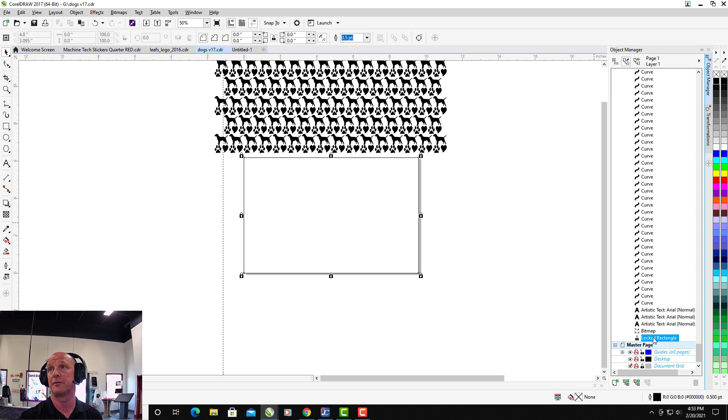So now that I've locked out the rectangle, I want to take my dogs and hold the control key down, and I'm just going to move this up so it goes straight up. What I want to do is take this and unlock it, select these, and go to Object, Power Clip, place inside the container, and then there's my job.

You'll notice if we look here, because when you do a power clip, it basically goes to the center of the rectangle, so everything is set up properly in terms of what I want.

But you can see here the dog is reflecting the other side here, and we've got the dog's head starts here and the bottom ends here. Okay, so everything is symmetric.

It's ready to go, and then basically we can send it off to the laser. The only other thing typically that I'll do is I've got the power clip rectangle selected, and I'm just going to right click on here. That's going to get rid of that object there.

Just in case it doesn't happen to be, you know, a .001 like a hairline, and that will accidentally engrave in the job, which I don't want it to do. So I've gotten rid of that.

The only other thing I need to do now is take my job and turn it 90 degrees, because remember, when we want it to go lengthways, when we bring in the job control is basically going to turn it 90 degrees, and I want my page to do that too. So I'm going to do that. Again, everything is in the center. I'm going to go File, Print.

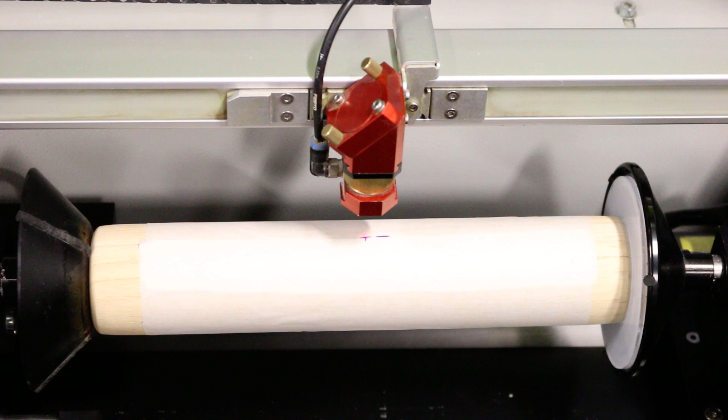I now have my rolling pin situated in my cone setup here on the laser machine.

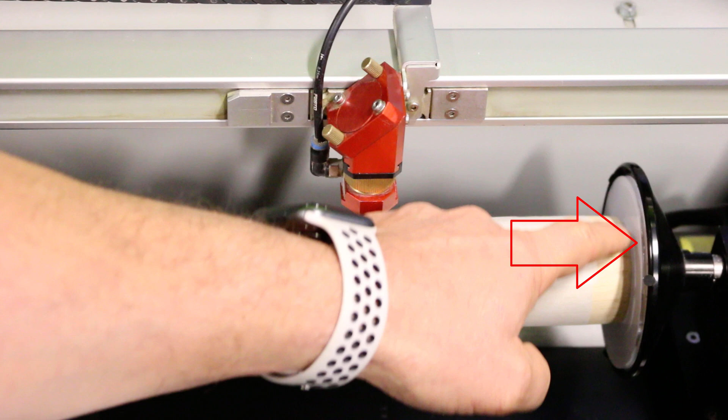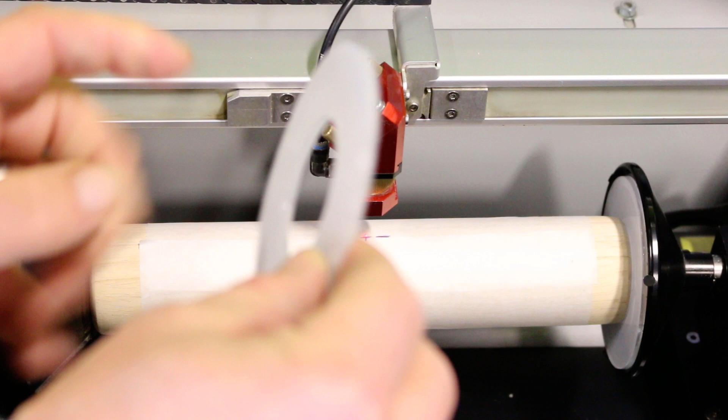Now, one thing to notice is the problem with cone systems for the roller is that this roller will be too far in, and then I won't be able to engrave part of the pin on the end. So what I did was I measured the size of this cone, which is almost 4 inches, and cut this piece of acrylic to be the outside, and I measured the inside part of the rolling pin to fit into here.

So I basically fit this in here. Now the pin sticks out from the cone, and it's in its perfect position. If you're doing this on a regular basis, you could just tape it in if you wanted to. A lot of times it's quite easy to stick that in the end of the rolling pin and press it up against there, and it'll turn properly.

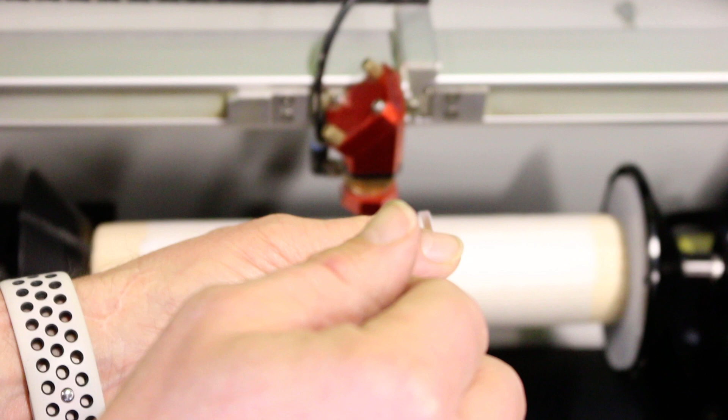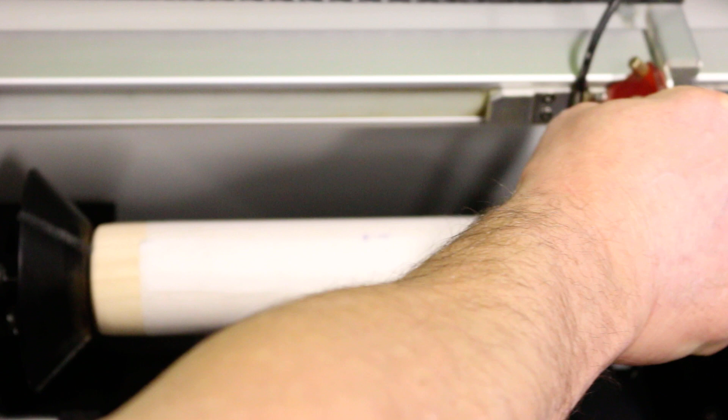Okay, so I've done that to bring the rolling pin away from the cone, so the edge of the cone doesn't get in the way. The only thing you have to make sure is that if you're going to go beyond here, it has to be clearing on the edge. I can check that now - you can see it's going to clear, and I don't have to worry about it hitting.

I've made a plus symbol here, and the plus symbol is basically my dash that I created. It also signifies the center of my actual pin itself.

So just like anything, what I'm looking to do is create something that's template driven, so that next time I do a rolling pin, all I need is a Corel Draw job set up properly, and now I need to make sure my job control is set up.

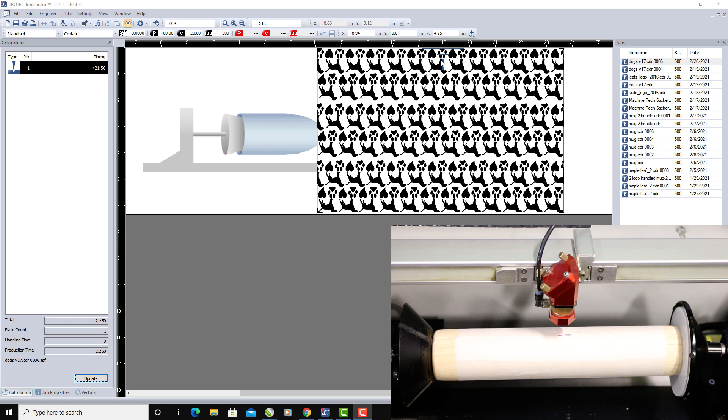What I've done is pressed F8 and created a marker here in the plate, so my artwork can snap to that, basically in the middle. There are a couple of things we can do to check this and make sure everything is set properly.

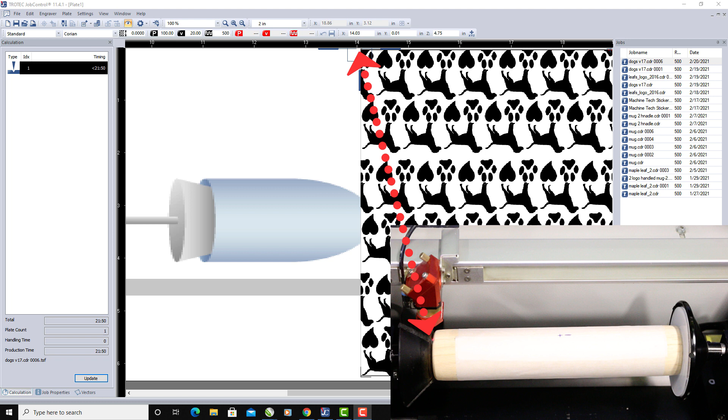I'm going to bring this over to the edge here just to make sure, and if I zoom in, you can see that I'm right at the edge, so I know I'm going to be perfect there. If I bring this all the way over to here and zoom back out, you can see I'm right on the edge there too. So my artwork is set up properly.

The only other thing I've got to make sure is that my turn is proper. So I've got that there. Let's activate my laser machine.

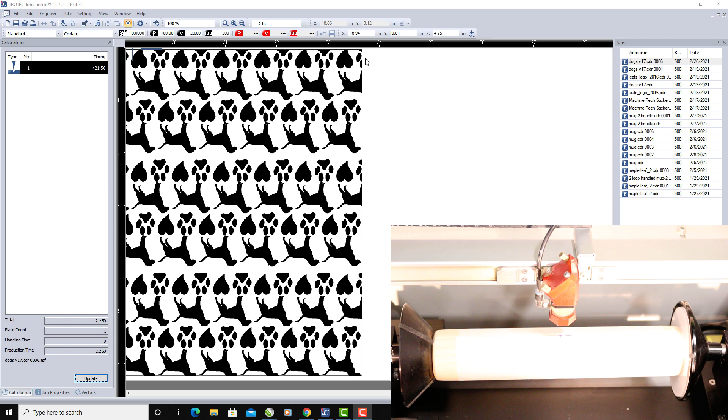Just take it out of suspend mode, and I'm going to use the bottom arrow here and turn this around. I want to make sure that comes up, which it does. If I look here, you can see I'm at the bottom of my artwork. So I'm ready to go.

Everything's looking pretty good. So let's run the job and make sure it goes all the way around and etches up for us. I'm going to take my masking off.

Just want to be careful on this, so let's bring this back up. You don't have to worry about doing any of this masking, because once we've got the template set up, we don't have to worry about anything.

Take this off. And I'm going to bring this back to the starting position, because it's not that big of a deal where we start.

But I don't like the job, the head, to be halfway down the bed, and then when it activates, it's got to go all the way back up to the top of the table. I want it to start directly at the top of the page, so there's no turn on the rolling pin - sometimes if you have something heavy there, it could slip if there's too much turn. So always bring it up to the top, and then we're going to start our engraving.

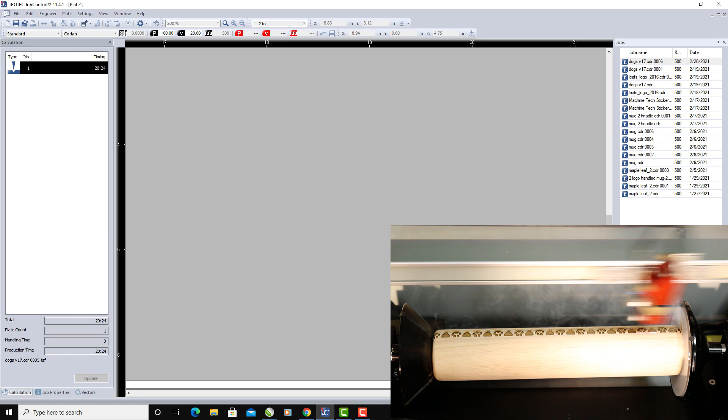So you can see basically that I'm getting a good engraving here. I apologize, I did say I was going to leave the masking on there so you can see how clean it is. Maybe what we'll do is we'll run another one, one with masking and one without, and we'll take a look at them that way.

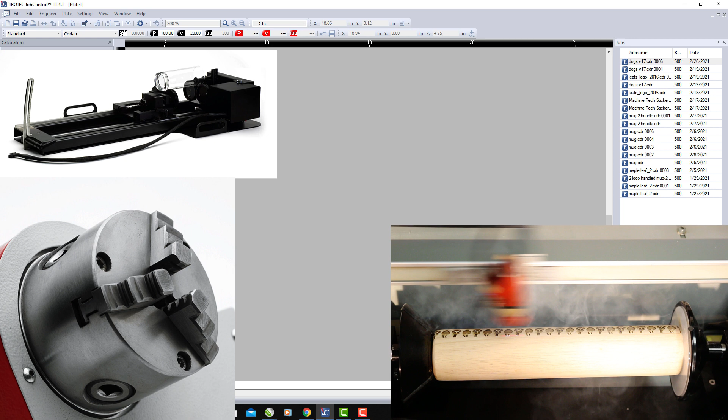You can see that you've got to be a bit careful because we are getting to the edge of the cones, so this is certainly something you have to take into consideration. We do sell a chuck system, and we also sell the roller system that can go along with this. If you want to use the roller, you'll get the clearance that way. The biggest problem with rollers sometimes is things can slip, it's not positive in terms of coming all the way back, so just something to consider when setting it up. I like to use the cone system, but certainly the chuck system, if it will open up enough and hold onto it, that's good too, so you can use that.

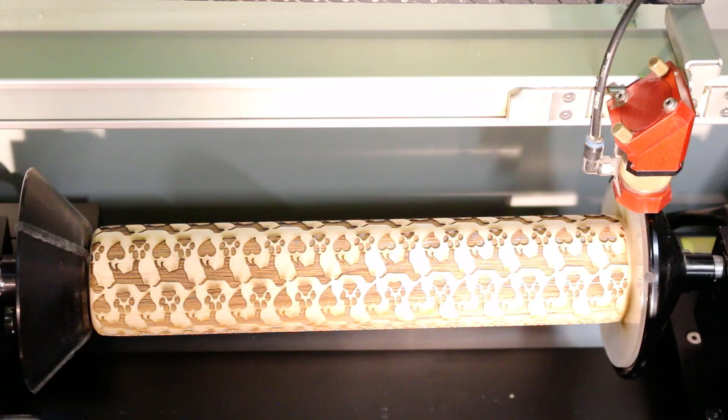So you can now see that I'm done my job, and really all I need to do now is release this back. I can reuse these if I want, and there's my image. You can see a little bit of discoloration going on here because I didn't mask this. What we'll do at the end here, I'll just take a small sandpaper block, and that should clean that up pretty easily. Okay, well, there's my finished rolling pins there.

This one was done with the masking. I still had to do a fair bit of sanding after the fact and cleaning it, so I don't really know if masking is really the way to go with the rolling pins, in this case anyways here.

This one here, basically all I ended up doing was using just a damp J-cloth and it came up perfect. So I must admit that probably the damp J-cloth is the best tool to get the residue off the pin itself. But you can see here that I've matched up perfectly, all the images are clear. I've got a little bit of overlap here, which is quite nice, I like to do that. You can't really tell where I started and where I stopped because everything is perfectly symmetrically done all the way around the actual pin itself.

Well, that's it for showing you how to go all the way around on an actual item and match up on the other side. I've done this a number of times, I like to do it on glass. I'm not an expert on doing rolling pins or anything like this, I just happened to grab one and thought I'd give it a try and see if I could match up. And as you can see, it's not too hard to do. Maybe one day I'll do a video on matching up for glass, but it's really a matter of measuring things out exactly.